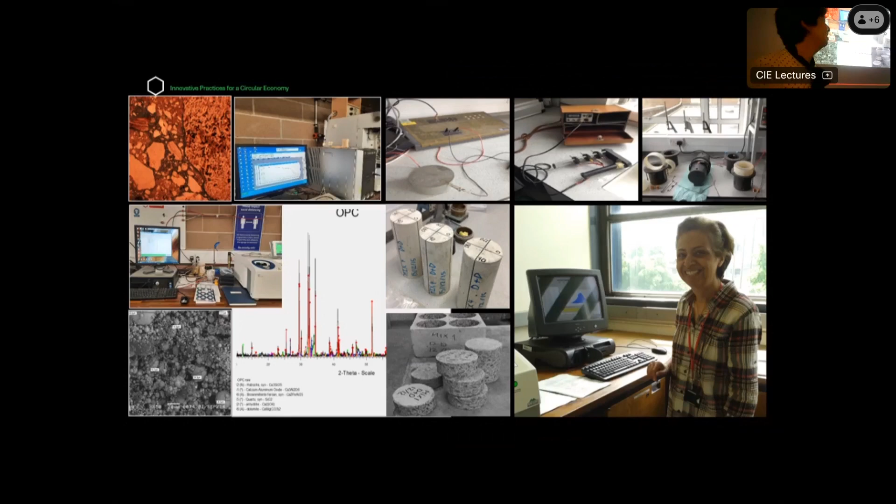As you know, cement is mostly energy intensive, so it consumes loads of energy and has a high impact on our environment through the emission of CO2. And on the other hand, there's the waste we produce every year, which is not a low amount; we are producing quite a high amount of waste.

So if we can manage to use that waste in cement instead of landfilling it, we can have sustainable cement, and definitely we can have quite good benefits for our environment by reducing our landfills, conserving our natural resources, which are now used in the cement industry, and reducing the CO2 emission of the cement.

So possibly you are familiar with these numbers. Cement is responsible for around 8% of the CO2 emission of the world. And if we go for concrete, which is the second most consumed material after water, then 80% of the CO2 emitted to the environment by concrete is because of the cement.

And also 20% of building CO2 emission, again, is embodied carbon in the cement used in the construction material.

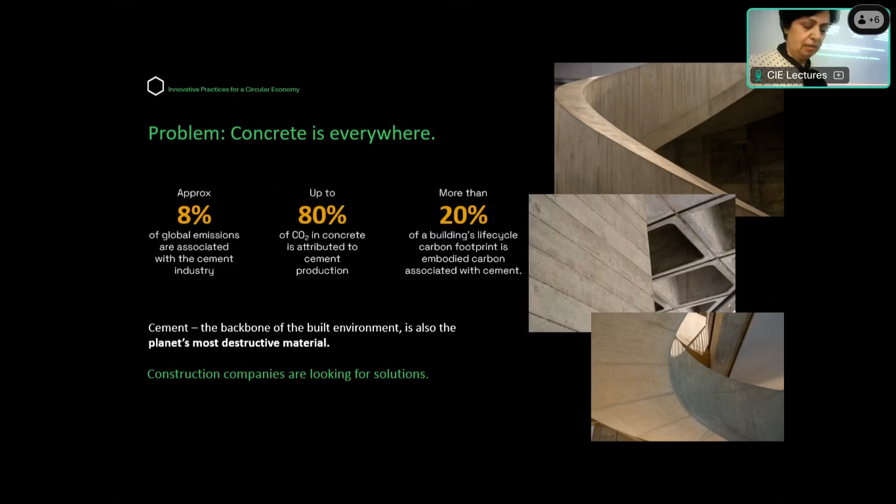If you go with the traditional production of cement, as I have shown here, we need materials like clay, limestone, sand as a silica source, and iron ore, which helps us reduce the melting point during production. So these are the four main materials usually used in traditional production of cement.

And as you possibly know, they should be quarried, crushed and transported to the factory, then milled and clinkerized, and after clinkerizing, cooled, ground and packed for the construction industry.

And I have shown in the right image how much energy is consumed and how much CO2 is emitted at different stages, which I got from McKinsey, to be honest about the reference of the image. So as you see, the main energy consumption and the main CO2 emission is in the middle part, which is calcining and burning fossil fuel.

That consumes around 3 gigajoules per ton out of the 4 gigajoules per ton we need for producing cement. And CO2 emission is mostly due to the calcining reaction and burning fossil fuel: 50% due to the calcining reaction and 30% due to burning fossil fuel.

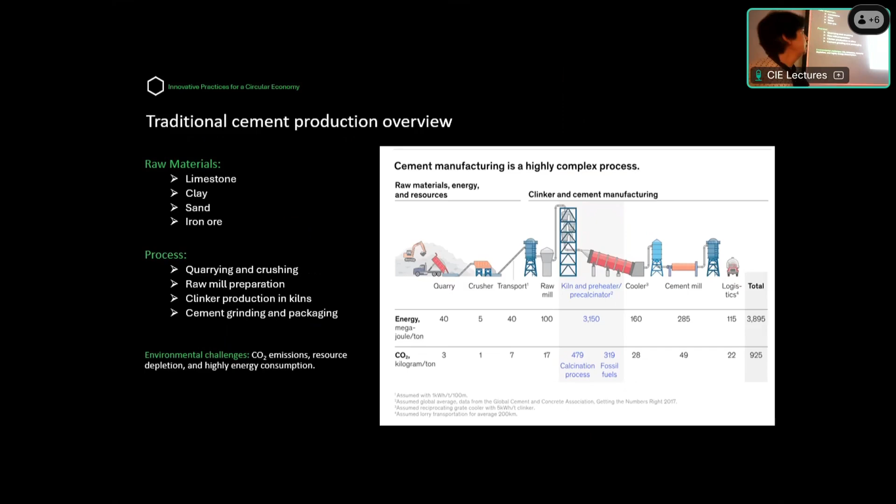So what waste can we use in cement, how much do we have, and how can we use it? Based on the World Bank report, we had around 2 billion tons of waste in 2016, and it grows to 2.6 billion in 2030 and 3.4 billion in 2050. So we have quite a lot of waste, and this is without considering municipal solid waste and construction and demolition waste.

And for manufacturing cement, due to the chemistry of cement, we just need three main elements: silicon, aluminum, and calcium.

So here I brought a different group of waste and pointed to some of the challenges they have. So first of all, the best one is metallurgic byproducts like iron and steel slag, ferrosilicon slag, copper, zinc, and aluminum slag. But the thing is, these types of materials get high temperature during the process, and if they are cooled slowly in air, they spend a long time at that high temperature, so they have time to form ordered crystalline material, which is less reactive. And we need to think of a way to make this material reactive.

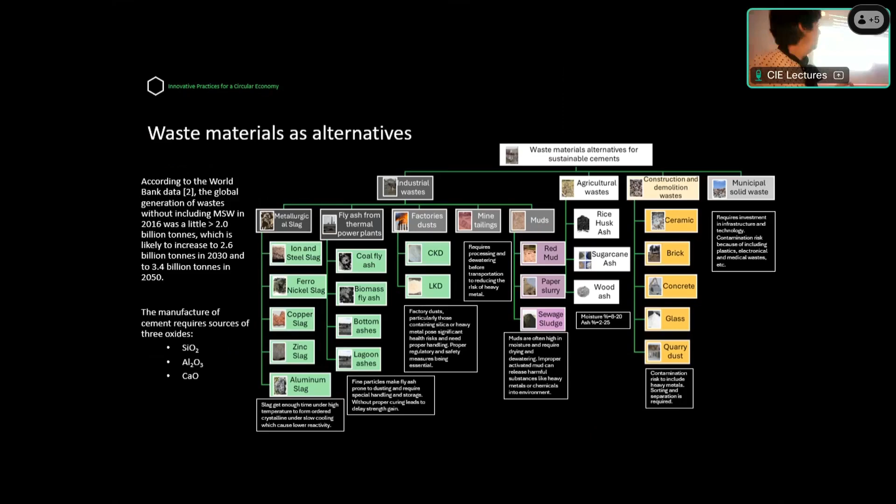So I described the challenges they have, but they also have a good impact, which I believe makes them good to use for producing cement and making it sustainable, especially looking at the future. We have no choice but to reuse the material we are producing as waste. So it has a massive environmental impact: it reduces landfill, reduces CO2 emissions, and conserves natural resources.

I know that for around 50 years some countries like Switzerland, France, and Germany have had co-processing cement plants, which means they separate the combustible and non-combustible material from municipal solid waste. The combustible is used as fuel, and the non-combustible is used as raw material. And compared to incineration of municipal waste, the advantage is that you don't have ashes and you don't have secondary material to be landfilled.

As I said, 11 billion tons of municipal solid waste we have that we should think of. And also as alternative fuel, when we use this material, we can conserve the high carbon coal and don't burn that to emit more CO2 in the environment.

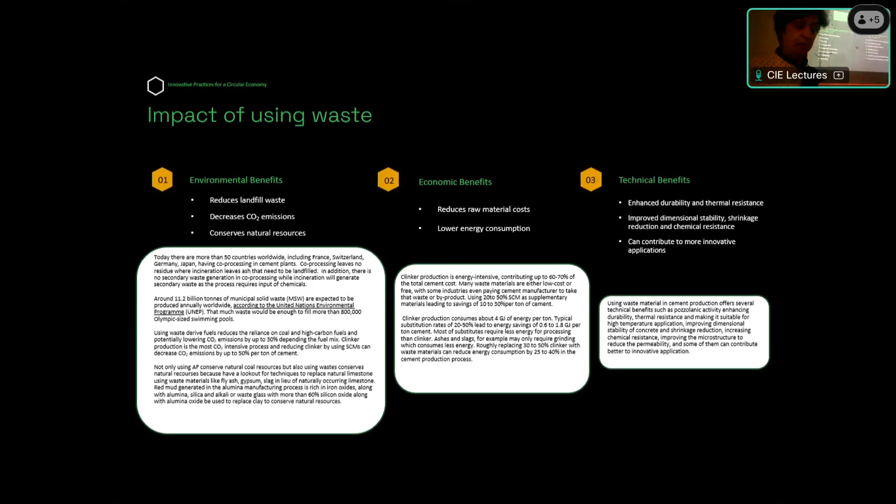So how about the process modification? As I said, all of these need processing. First of all, they need sorting and screening. The different materials should be separated, and different sizes of the waste should be separated based on the application. And some of them, as I said, need crushing, need drying. For drying, there are usually three types: passing hot air, or contacting the material with a hot metal screen. So different ways of drying need to be used for these wastes.

Also, compaction is needed. For example, dusty material is better densified before we consume it in our production. Some of them have high magnetic content, which makes less reactivity; we can't activate those materials properly, so the magnetic part should be separated. And based on having heavy metals, some chemical treatment, oxidizing or using acid for extracting the heavy metal, is needed, plus pelletizing and blending some of them to have the raw material for our cement.

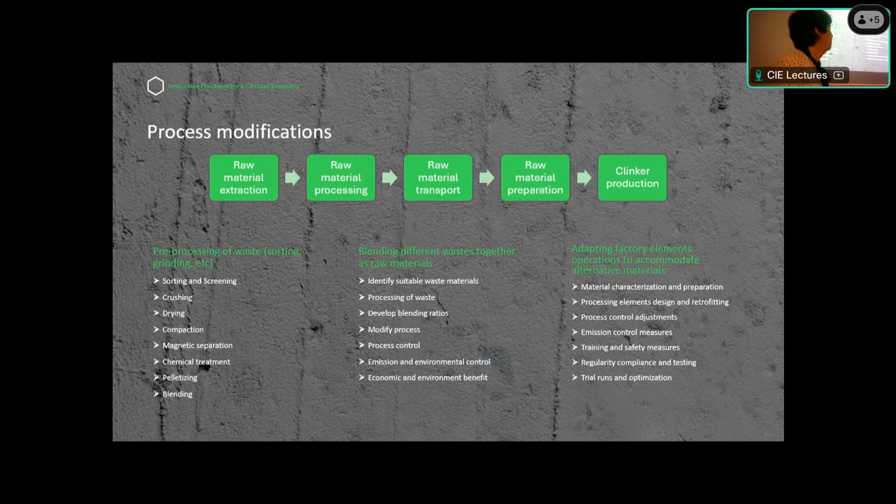If I want to summarize, I say that we should have these three elements, which are the major elements of producing cement: silicon, calcium, and aluminum. And then we can go for different activation, which can be chemical, mechanical, or thermal. I put them in order based on the simplicity of using them.

Chemical is an aggressive material that can dissolve our waste, and then it should have the property to be jellified again after dissolving. And mechanical is an aggressive way that you can change the surface, you can make a hot spot on the surface of the particles to react together. You can break down the crystal, reduce the melting point, and based on this treatment you can have your binder.

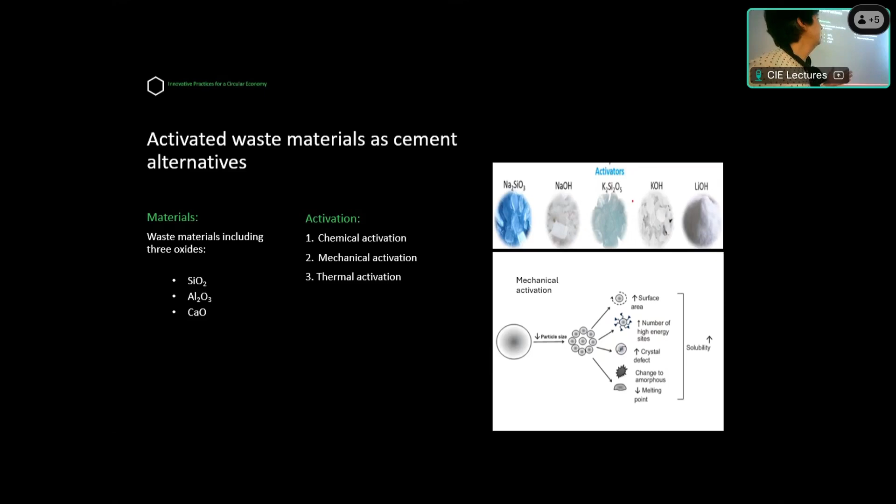And finally, thermal activation: if we want to use it, definitely we need renewable energy, and somehow our material should be energy efficient. So for all of these, I know that there are very big challenges. I brought some challenges and, according to them, some solutions.

So the main challenge is the variation of the waste. Different waste has different characteristics and is very variable. Even different batches of one type of waste have quite a lot of variation. And I think the solution is standardizing the material and giving some certification, waste certification. So if we standardize the waste and say that based on the process we have done, this is certified and can be used as raw material for cement, then possibly this challenge can be solved.

Another thing is high investment in initial processing, and that possibly needs governmental encouragement and policy. For example, putting carbon costs on our material to be more realistic when we compare our material with traditional cement. If the carbon cost is there, then those materials are more comparable, and people move towards using more sustainable cement and concrete.

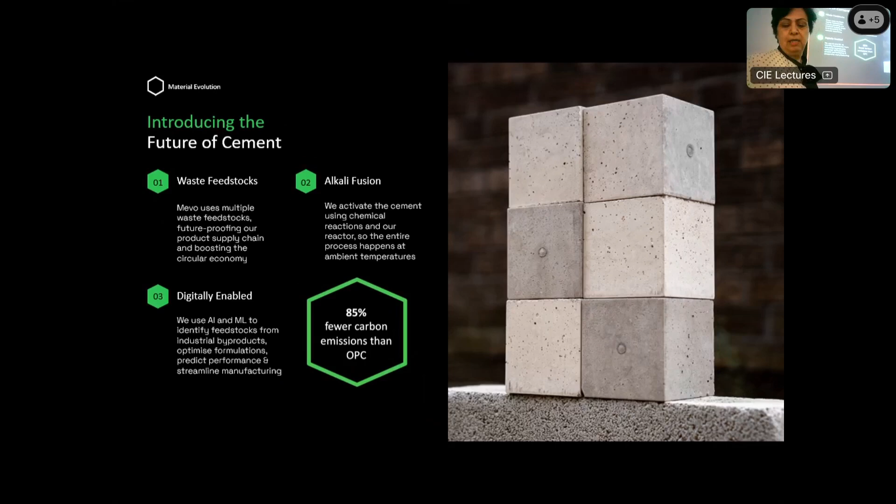And we want to make it digital, to have more data access, and then use AI and ML for optimizing this. So far, our product is a zero clinker product. We produced the first one, which is zero clinker, a class 52 binder, a one-part geopolymer, and it saves 85% of the carbon emission. But we are moving forward to make it much better using different types of waste and different types of activation systems, to hopefully have many of them.